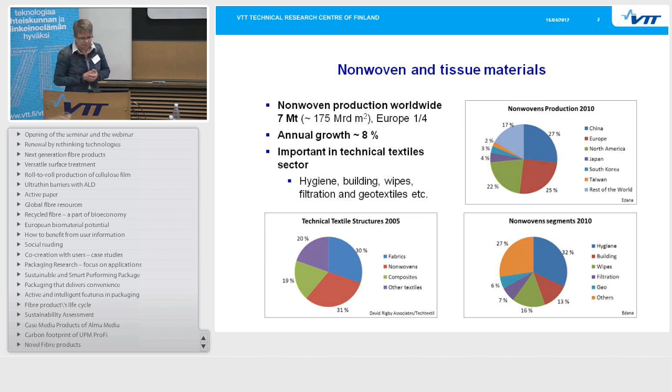What are non-wovens? They are made directly from fibers, like paper, but the fibers are typically longer. We are not making yarns before making the structure like in textiles. The product properties can be adjusted by adjusting the raw material and the processing methods. So we can make a wide variety of materials, ranging from very dense and stiff materials to porous, fluffy and soft structures. And these materials are filling the gap between paper and textiles.

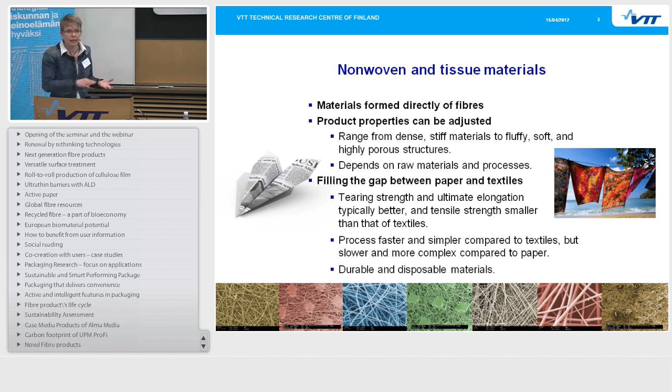We can use similar processes as in paper making, except wet laying longer fibers when forming the non-woven. But we can make very textile-like soft materials, and typically the tearing strength and the elongation are better compared to textiles, but tensile strength is lower.

And compared to textile processing, where we have to make yarn and then make the structure and so on, the process is simpler in the non-wovens area. But compared to paper, except in the one case where we use a similar process, non-woven processing is typically more complex. So in that way, we are also between paper and fabric. And we can make durable products or disposable materials, depending on the raw material.

There are some scanning electron microscope images of the different non-woven structures, also of different sizes, nanoscale and microfiber non-wovens.

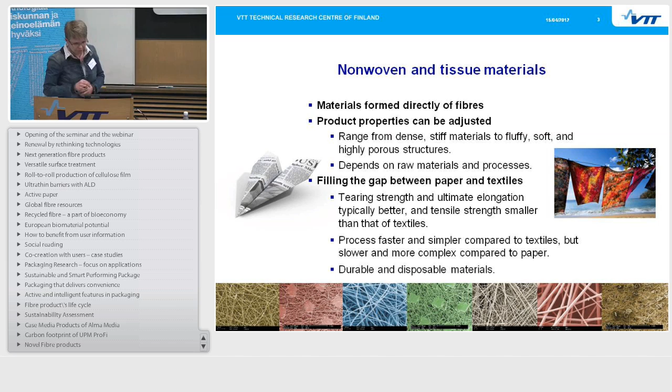But I will tell something about the production of the non-wovens. Like I said, the properties of the non-woven depend on the raw material. We can use natural fibers, or synthetic fibers, or man-made fibers made from bio-based polymers. Natural fibers are, of course, staple fibers with a certain length, but synthetic or man-made materials can also be made in filament form.

We are forming the web, and then we have to bind it and finish it. For web forming, binding and finishing, there are 3 categories of processes. For web forming, there are dry methods, wet methods, and direct methods. With these natural fibers of certain length, we can use wet and dry methods for making the web. Direct methods are only for man-made synthetics, so we use polymer, spin it and lay it directly into web form.

The wet laying method is a process similar to paper making, and foam forming can also be counted in this category. In wet laying we mix the fibers in water and then lay them into web form. In dry laying, we can do the mixing in an airflow and then make the web, or use cards which comb the fibers. Binding can be made mechanically, chemically, or thermally if we have some thermoplastic material in there.

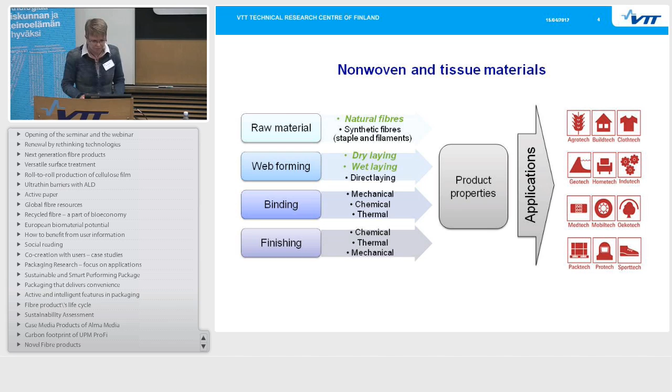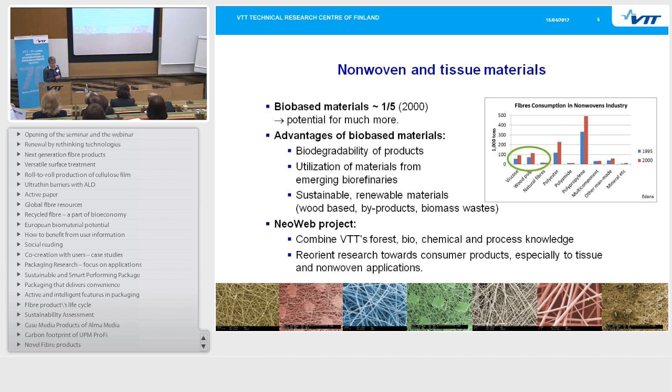Bio-based materials are about 20% of non-wovens. There are viscose fibers, wood pulp, which can be used as part of the material, and other natural fibers. So there is a large potential for growth there also. We can use them instead of synthetic polymers.

Advantages of bio-based materials are, of course, biodegradability. We can make temporary geotextiles to reinforce earth slopes before plantation, or make recyclable composites using recycled materials, and also biodegradable resins to make compostable composite materials. We can utilize new materials from the emerging biorefineries, and these are a sustainable way to make things.

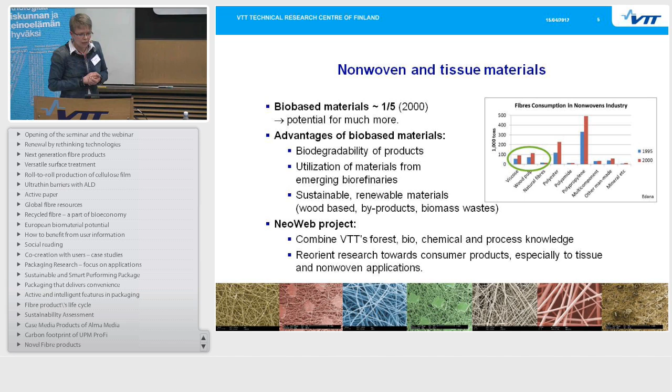At the moment, we have an ongoing project, the NeoWeb project at VTT, where we want to combine VTT's forest, bio, chemical and process knowledge and reorient this towards tissue and non-woven applications. In our NeoWeb project, our main interest in the web formation area is foam forming. We have already heard about foam forming, and we are utilizing these knowledges and technologies in the NeoWeb project. Many of them have already been discussed earlier today.

So cellulose fibers and their modification, nanocellulose, nanoparticles, biopolymers of different kinds. We can also use foam, in web formation but also as a coating and finishing method. Plasma coatings are also applied. ALD, Jenny told about that earlier. Electrospinning to make nano-sized non-woven layers or coating layers, and different kinds of printing methods are also combined in this project area.

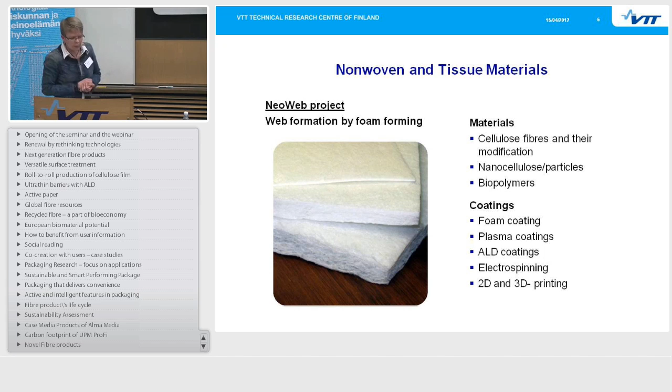So if there are people who are interested in getting to know this new non-woven area and our project, you can contact me. But that's shortly what I planned to talk about.